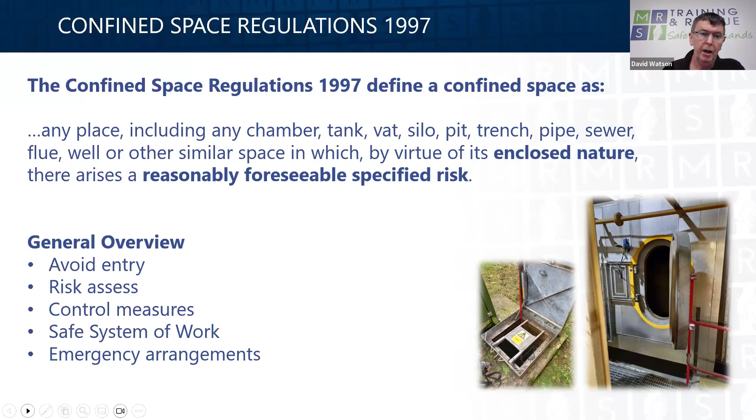When he talks about the specified risks, the first one is to do with injuries to people from a risk of fire or explosion. The next talks about loss of consciousness through an increase in body temperature. Note that it says increase in body temperature, not a change in temperature. If we talk about the cold, you could put layers on to prevent yourself becoming cold, whereas with body temperature, once you've got down to skin level, you can't go any further. So it's about being aware of that increase in body temperature.

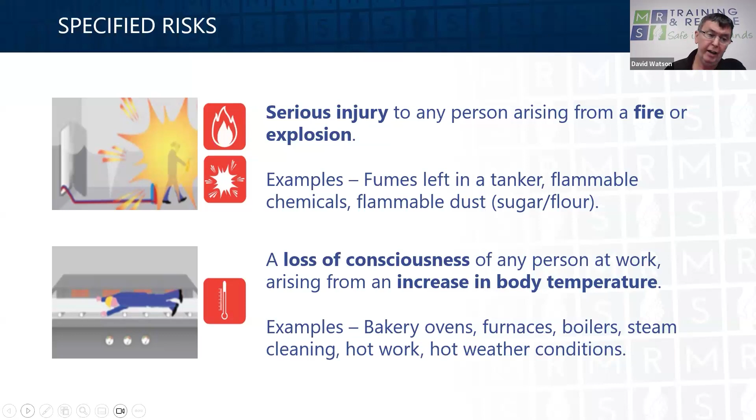The next one is looking at the risk of asphyxiation from a gas, fume, vapor, or the lack of oxygen. Oxygen is quite a weak gas compared to other gases, and it is very easily displaced, so we need to make allowances for that sort of stuff.

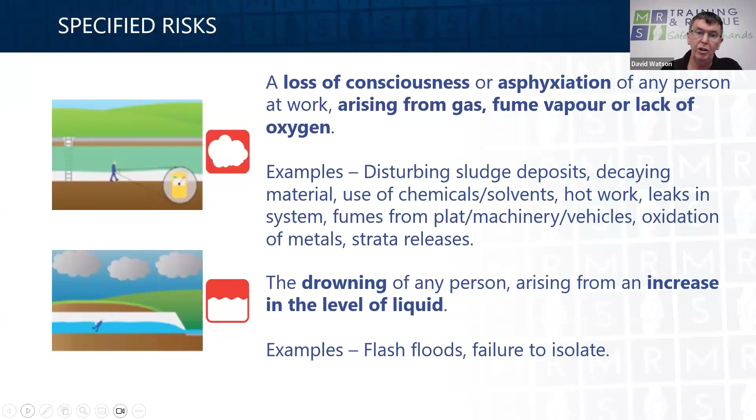The next one is the drowning of a person arising from the level of a liquid. So things like working in reservoirs and things like that - you've got flash floods, and full failure of isolations, which is another one.

And then finally, the asphyxiation of a person arising from a free-flowing solid, or the inability to reach a respirable atmosphere through entrapment. So things like working with grain or flour in silos or bunkers. Little note at the bottom there - these hazards could just be naturally present, or they could be introduced by the work you are doing within that confined space area.

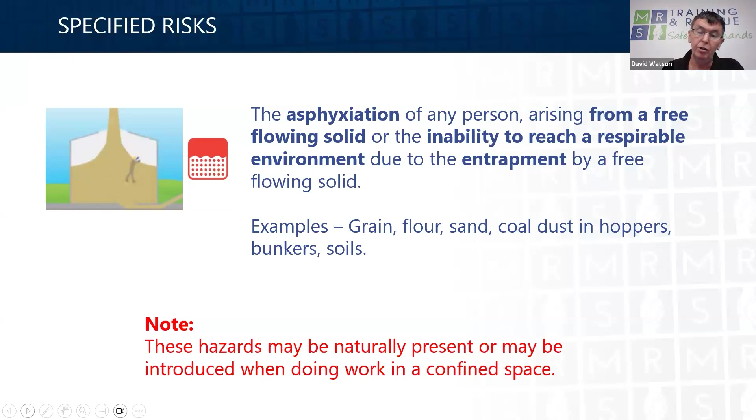So those are what's called the specified risks. In order for an area to be categorized as a confined space, you have to have that restricted area plus one of those specified risks present.

If you do have a confined space, then somebody needs to define what it is. A competent person needs to be appointed to manage that area - things like identifying what the specified risks are, then risk assessing that and trying to eliminate them wherever you possibly can.

Then the next part is looking at trying to devise a safe system of work, including thinking about things like isolation, ventilation, whether you need any access equipment, and what kind of lighting is required, all that kind of stuff.

And then you need to think about the people that are going to be entering it - what competencies do they have, what training have they had, and are they fit to undertake the work within the confined space?

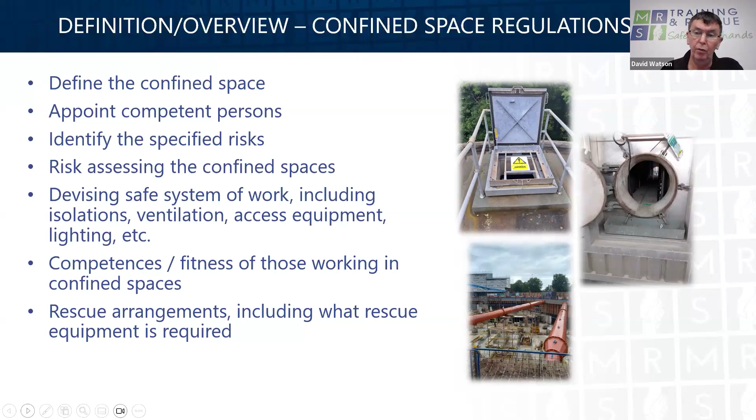And finally, talking specifically about things like rescue arrangements, including what rescue equipment is required as well, all of which will need to be defined prior to anybody entering into a confined space.

There are a couple of handy guidance notes and approved codes of practice issued by the Health and Safety Executive. INDG 258 is accessible via the HSE website, and it gives you guidance with regards to what you should be thinking about when working in a confined space.

The L101 approved code of practice sits hand in hand with the confined space regulations, and it explains in a little more detail what you should be considering when it comes to safe working in a confined space.

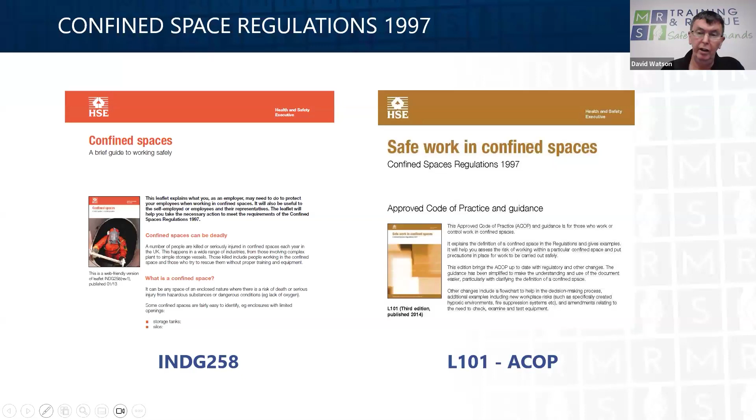When we talk about confined spaces, we generally classify them into one of two classifications. There's a Water UK standard classification, which calls them NCs, specific to the water industry. And then there's what's called the National Occupational Standards, the NOS, which are kind of like job profiles with regards to working in confined spaces.

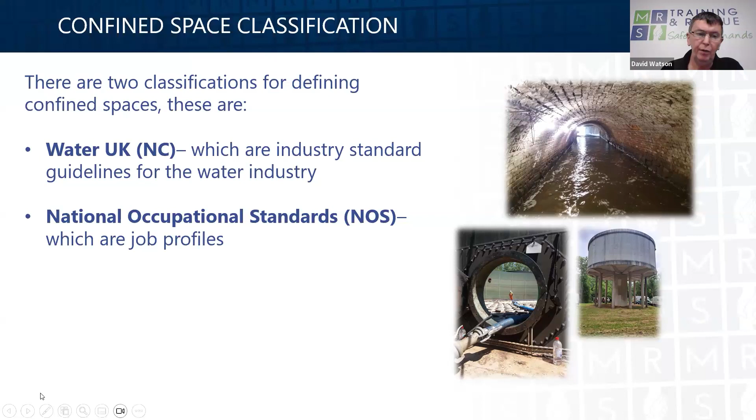So if we look at the first one, the Water UK classification, they define them as NC1, NC2, NC3, NC4, and NCX.

NC1 is a low risk, shallow entry, such as meter pits, valve chambers, and things like that, where ventilation is quite good. It's simple, unobstructed access to or egress into that sort of place, something really easy to get in and out of.

The next one is NC2, where it's probably getting a little bit deeper. It's vertical, direct, unobstructed, and you're continuously attached to a person riding hoist or similar mechanical rescue device, such that if there is an emergency, the person on the outside can simply engage the winch or hoist and pull the person out of the confined space.

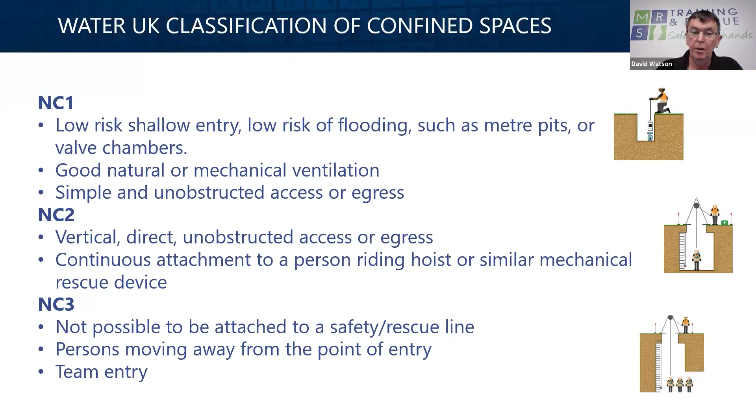NC3, again, is vertical, direct, but this is where it's not possible to be attached to a safety or rescue line. It would generally involve people moving away from the point of entry, and these ones are normally where we get a team entry.

NC4 is where it starts becoming a little bit more complex. It might be a non-standard access or egress, might require specific controls, and might require a specific type of rescue arrangement in order to get someone out of that confined space.

Quite recently they introduced NCX, recognizing the fact that not all confined spaces are vertical entries. Some are horizontal, some you access by going in and then going up. You may have to have specific atmospheric condition analysis, access arrangements may be a little different, and rescue plans would have to be devised specifically for the risks present in that area.

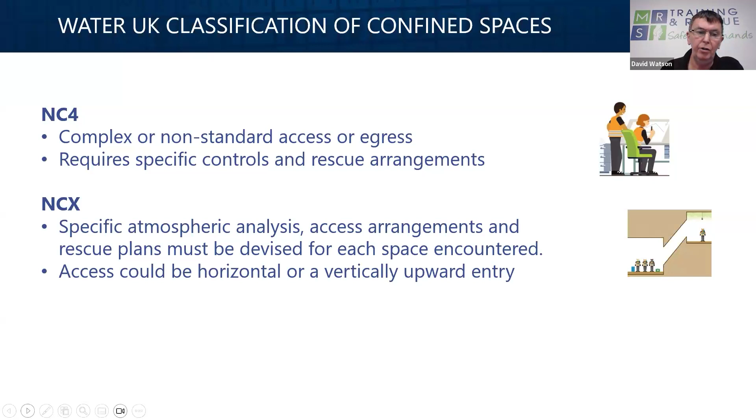So that's the NC, the Water UK classifications. The National Occupational Standards talk about something very similar in some ways. So the low risk entry is simple, unobstructed, with good natural or mechanical ventilation, low likelihood of a reasonably foreseeable risk being present, and it may involve working alone or as part of a team—something along the lines of valve chambers, meter pits, or similar.

The next one is the medium risk category, a bit of a deeper area. The entrants may not be in sight of an entry point, and standard entry or egress will inevitably involve some access equipment. The specified risks, whilst being identified, are easily controlled, through either isolations or similar measures.

Medium risk would generally involve a team entry, based on the fact that all the people going in will carry appropriate escape breathing apparatus, depending upon things like how far they're going into the confined space and what they're doing there. There are a multitude of different types of escape breathing apparatus currently on the market for that.

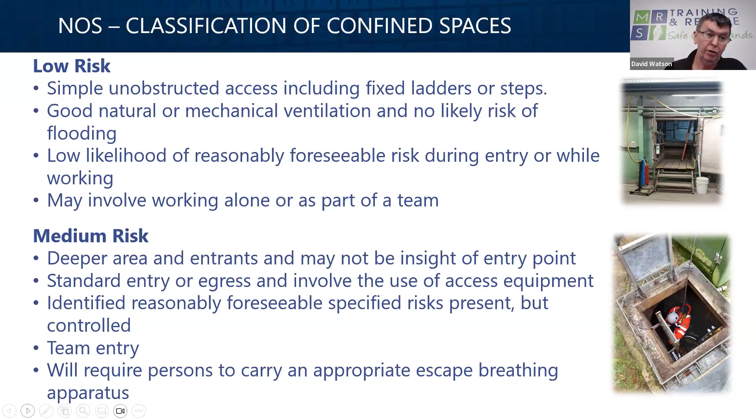And then finally, the third one is a high risk kind of confined space area. It's generally non-standard, could involve a remote entry to a specific area. There will be specified risks that may not be easily controlled, or the work activities inside the confined space may increase the risk level, so you need to be thinking about wearing breathing apparatus when working in those areas.

All of those areas we're talking about will require some element of people being outside of the confined space. So whether you've got entry controllers, you're certainly going to need someone in charge of the works, a supervisor, and a fully equipped emergency rescue team to enter without delay while the confined space is live.

So those are the classifications generally for confined spaces.

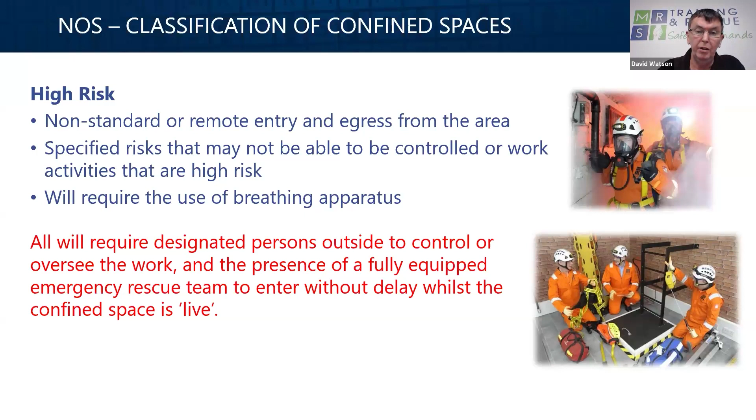When we start looking specifically at hazards around confined spaces, so not specific to those specified risks, but there are other things that could cause an area to become difficult to get in and out of.

So things like whether there's chemicals involved that you're working with, whether there's mechanical equipment, falling from heights. So inevitably, if you're going a vertical entry, there is a potential for falling from height, contact with moving machinery.

There's biological hazards that we need to think about. So if you're going a lot of places, if you work in plants and machinery, then there is always the danger of things like Weil's disease or leptospirosis, hepatitis, obviously tetanus, are all kind of biological hazards that we need to think of.

A lot of obstructions within the area, certainly with regards to maybe height restrictions. And then you've got human hazards, so people tripping, stumbling over things, or even the fact that there are too many people within the confined space.

I've been on a few jobs where we are providing rescue, and we've come across hazards that wouldn't have normally presented themselves to us. The image you're seeing on the right-hand side there, that was a job we were doing up in Edinburgh. It was quite benign, or so we thought.

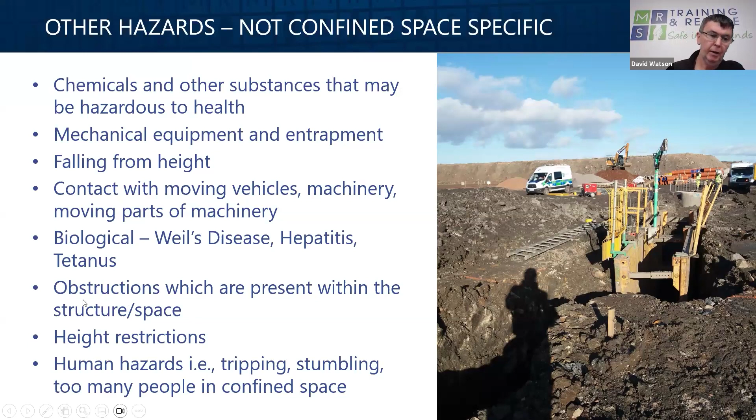There is a little bit of a flowchart that you can look at here with regards to deciding whether something is or isn't a confined space. It simply flows that, is it substantially or totally enclosed? If it isn't, then it doesn't conform to the confined space regulations, they do not need to apply.

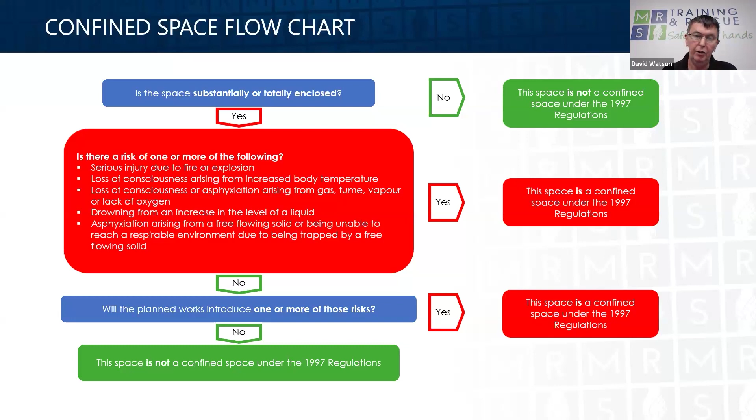If you have one of the specified risks, then it is a confined space. If the answer is no, you don't have one of those specified risks, does the work involved introduce one of those risks, in which case then it is a confined space. So most of the time, most people just call it a confined space and then put all the measures in place that need to be.

So the next bit is looking at things like how we would prepare to enter and exit a confined space.

Not to train or teach you in any way, but this is just some of the considerations you need to think about whilst and if you are preparing to enter or to work inside a confined space. So a lot of the time, certainly working in confined spaces, we always get people to think about the brief, think about who's going in there, think about who's doing what.

Think about things like a point of work risk assessment. Again, a lot of risk assessments are written well in advance of going into a work area, but on the day something may change, the weather for whatever reason. Rather than stopping the job, providing a point of work or dynamic assessment allows the work to continue as long as it doesn't affect the main body of that assessment.

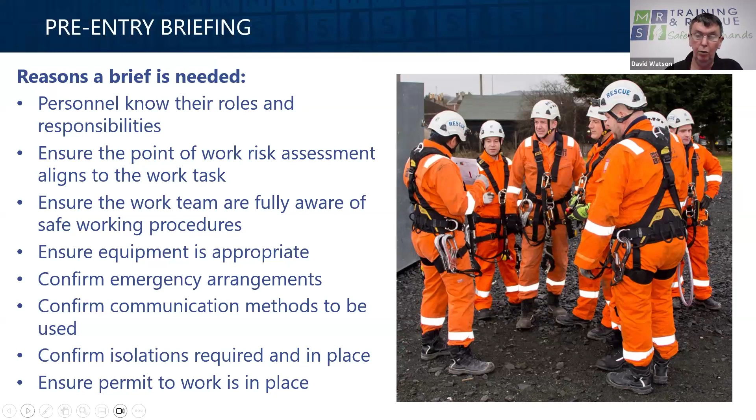Making sure that everybody's aware of what their roles are, making sure the equipment's appropriate, making sure we have what the emergency arrangements are, and that everybody's aware of what they are. Things like communication equipment - if you're moving away from a point of entry, you'll need equipment to talk to people inside the space and to contact your site agent or whoever's running the area. Making sure isolations are all confirmed and in place, and that in the majority of instances a permit is in place to carry out the work.

So once we've done all the briefing, then obviously making sure that we've got a suitable and appropriate exclusion zone, with barriers around that, and warning notices clearly displayed saying to people that we're working inside the confined space. Vehicle movements in the area are reduced, and someone is monitoring the weather conditions, because if the weather suddenly changes it will start to affect the environmental conditions inside the confined space.

Making sure that entry and exit equipment is properly checked prior to anybody going in, and that you have a safe means of access and egress, and that there's not a lot of equipment scattered around the entry point, which would make it very difficult to get into and out of.

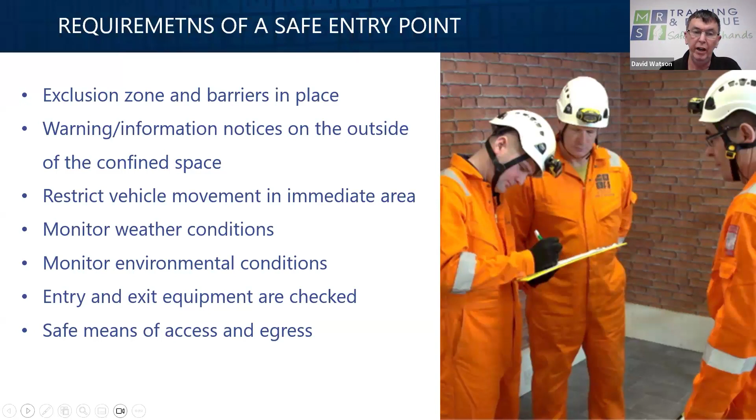We have to consider the environment inside, so it might be that you need ventilation systems. Ventilation systems can either be natural ventilation, forced, or exhaust ventilation. These generally ensure the oxygen content doesn't fall below 19%, they dilute any gases or flammables to prevent build-up, extract or dilute dust, and in some ways control the temperature and humidity whilst you're working inside that confined space.

A lot of companies tend to use combined ventilation systems, so you'll find an area where they're forcing the air in, and further inside the system they'll be extracting it out. A lot of waste recycling centers, where we do a lot of work, have air being sucked in from one area and drawn in from another, with huge fans and ducting where this process happens. It generally does work to control temperature and things like that.

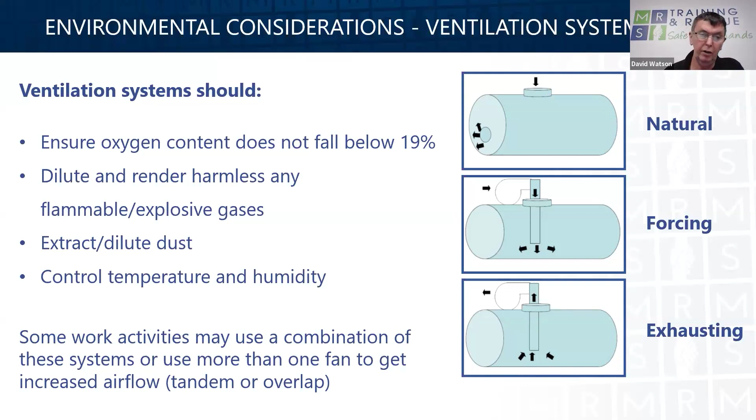The next consideration is for things like gases. The gases we monitor inside a confined space - it's quite critical that we make sure they don't creep up on you and build up to a level that causes a problem. These gases can be asphyxiants, flammable, toxic, or explosive - they could even be a combination of one or all of them. You just have to be aware of what these gases are and how they work.

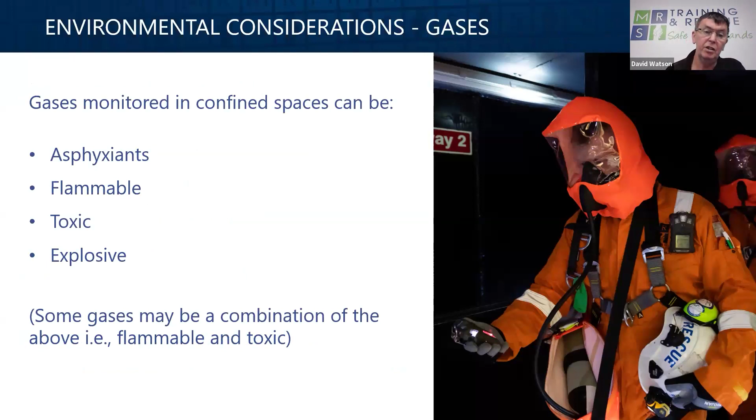So to monitor these gases, we have monitoring equipment. Generally it's either a fixed monitor - some areas and jobs we've worked on have fixed monitors so the area is constantly being monitored all the time - or people have battery powered monitors, which they either wear or are fixed inside the area they're working in. That's just an example of some different types of gas monitoring, but it's always a good idea to have gas monitors because they're doing something you need to be aware of, in the background.

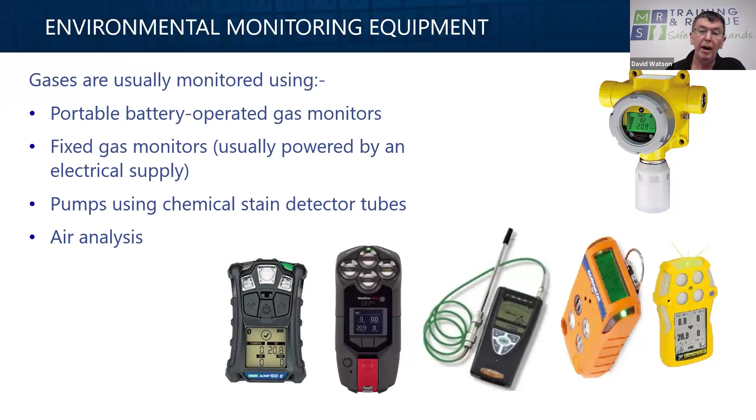What we're monitoring for are, as an example, some of the gases likely to be found. Generally the gases in this table are listed in specific gravity order. It's good to know the specific gravity of these gases so you at least know where to look for them. If you look at the top, hydrogen and methane are very light gases, so they'll tend to sit at the top of a structure, whereas sulfur dioxide and nitrogen dioxide are really heavy gases and they'll tend to hold around the floor.

There are what they call work exposure limits. If you look at the guidance on the right-hand side, all of these guidance, times and exposure limits are all contained in what's called the EH40, the Workplace Exposure Limits document, which is produced by the Health and Safety Executive. This is where these kind of limits come from.

A work exposure limit is worked out around what's called a time-weighted average over an 8-hour period. So if you take a typical gas, say carbon monoxide, it attaches itself around the breathing zone. It has a lower limit, or work exposure limit, of up to 20 parts per million. It also has what's called a short-term exposure limit, so if the level increases beyond 100, you've got less than about 15 minutes to be in that area. It's one of those things that, again, the reason we monitor it is because we want to know how much we're being exposed to, and whether we're getting to areas where the gases are too dangerous for us to continue.

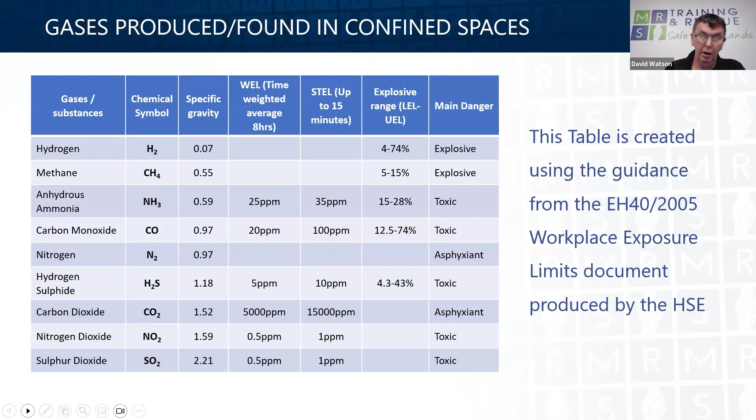Once the confined space work is all done and finished, we have to go through and make the area safe. The reasons we do that are quite obvious - we don't want people going in after we've come out. It's to stop things from going in, debris, waste, or whatever, and it allows a natural closing off of the permit. So the last thing you do is make sure everything is out, close the top, and then the permit is signed off to say we've sealed it and it is now back to how we started.

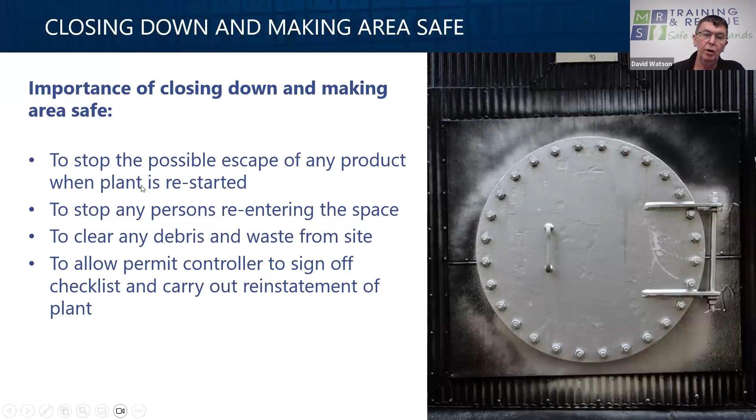This is just a little bit more on that - it talks about site protection. It removes the risk to the public. Not all confined spaces are on sites where we have clear control over people getting access to and egress from those places - it could be that you're working at the side of the road or something along those lines. So by sealing it up and closing it down, you are preventing any people or the public from getting access. It's also a legal obligation - the confined space regs say that a confined space has to be sealed up once you've finished working inside it.

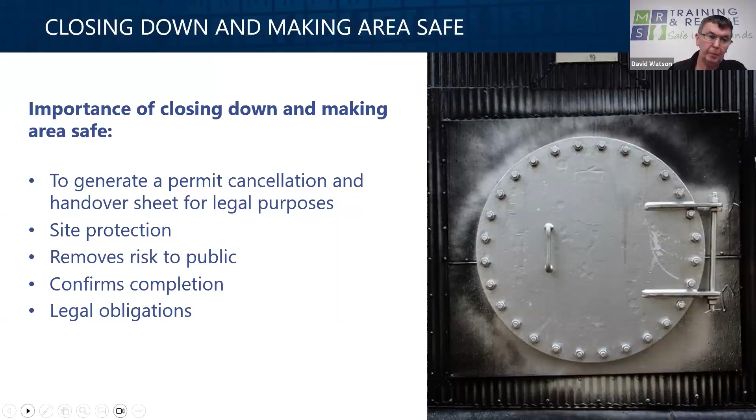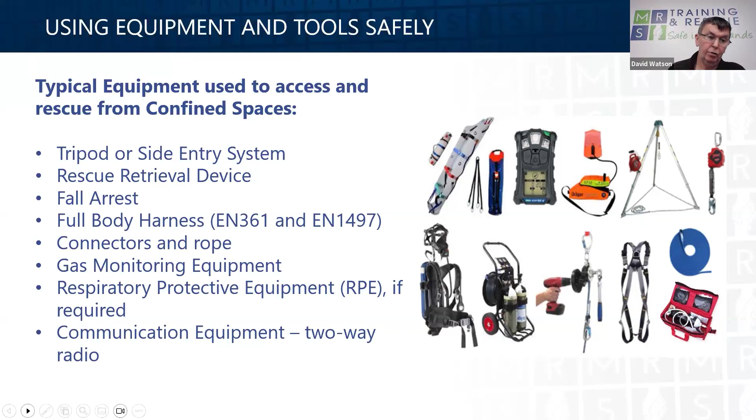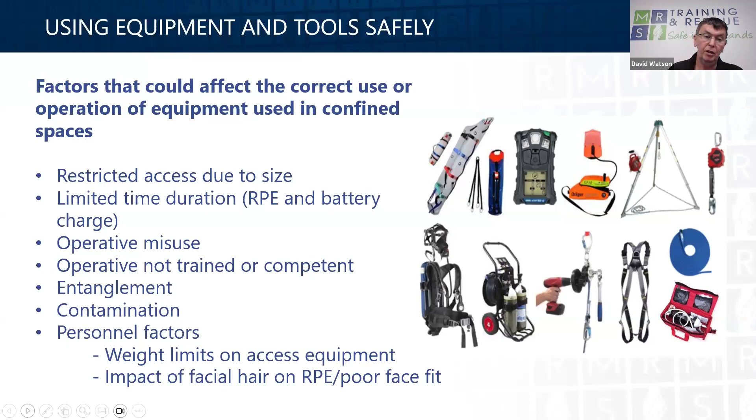So despite your best intentions of putting all sorts of control measures in place, an isolation could fail. For whatever reason, a gas builds up to the point it's now causing a fire or explosion risk. Or it could simply be the fact that you're working in a confined space and the weather has changed, the sun comes out, it heats up that nice big metal silo, in which case inside that area the temperature becomes such that people start getting hot and stuff like that.

Other hazards you're likely to face include things like power failure. If you've got a ventilation system that's operating and keeping that flow of air inside, and suddenly you lose your ventilation system, then it's an emergency and people need to be withdrawn from the space. But a lot of the time, hopefully, if you've put all your control measures in place, the chances are the only things you're likely to come across are maybe an injury or an illness from someone either tripping over something or generally not feeling very well prior to going in, in which case their illness becomes exacerbated inside.